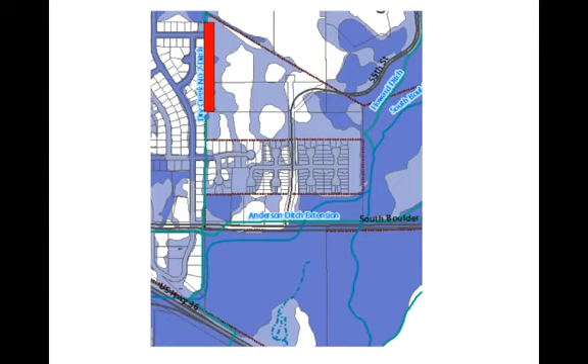Hey, this is just a quick presentation to talk about some of the issues that we've just encountered with the Hogan-Pancost flood study. So here we have, of course, the 100-year and the 500-year floodplain. The dark blue shows the 100-year, the light blue shows the 500-year. What the developer is proposing to do is develop a 1,000-foot long, 40-foot wide flood conveyance channel along the west side of this property.

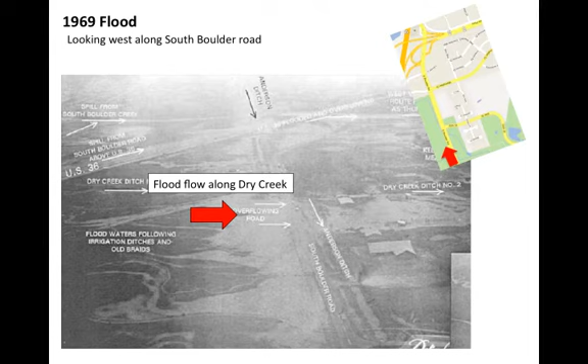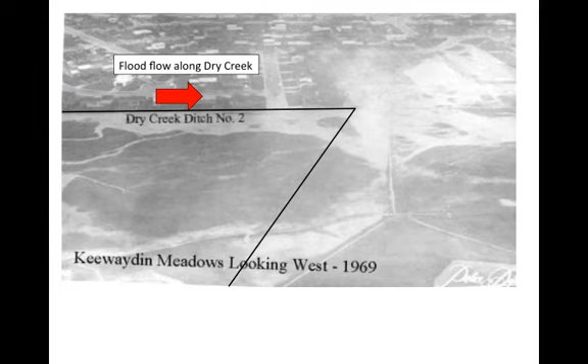So here we have a picture of the 1969 flood. As we see, we had extensive flooding along that Dry Creek Ditch corridor. Well, it turns out that that is actually an old alluvial flood channel of South Boulder Creek. We in South Boulder are basically victims of geography. Here we have that 69 flood now looking over the Hogan-Pancost property. And again, we can see those extensive flood waters flowing, even flood waters backing up into Kewanee Drive.

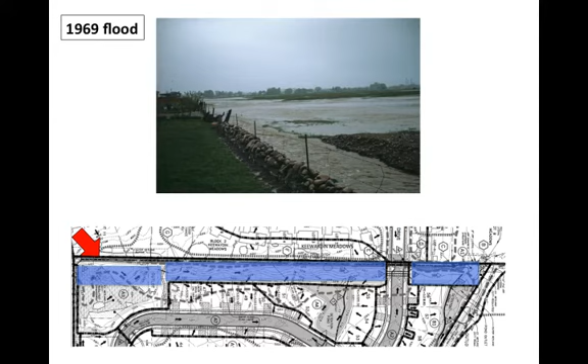Now what they're proposing to do is shown on the bottom here, and we're looking from the east to the west on that map. Here's a picture that shows the flood channel in the 69 flood from the south. And likewise, here is a photo taken from Kewanee Drive looking south. That's the Hale House in the background there.

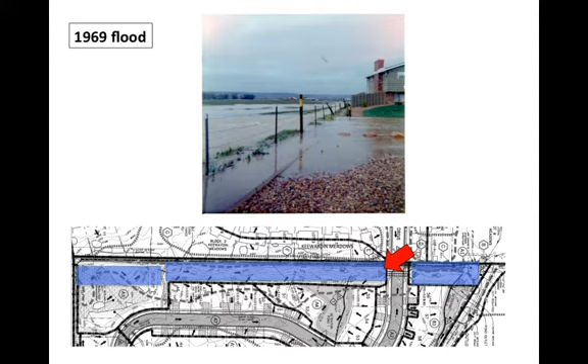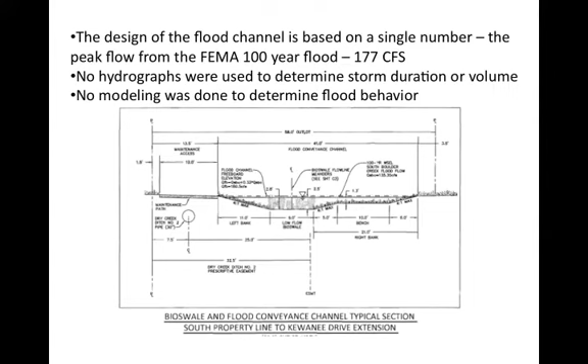Okay. So, the design of the flood channel is based on a single number, 177 cubic feet per second, the peak flow from the FEMA 100-year flood. They do no further analysis. No modeling was done to determine flood behavior. No hydrographs were used to determine how fast the floods come in, the overall storm duration, and the overall volume of it. We feel that this is a real problem. The city has the data, the city has the hydrographs, but they weren't used here.

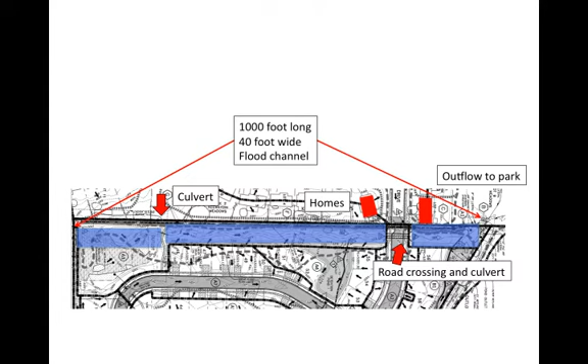Okay, well let's take a little closer look at this flood channel. Again, it's a 1,000-foot long, 40-foot wide, constructed flood channel in an active floodplain. We have a path and a culvert on the left, that's on the south side. We also have the Kewanee Road crossing and a culvert on the right. We also have a couple of homes that are very close to that flood channel. So let's take a closer look there. So as we see, now we're looking where the flood channel is flowing up to the north.

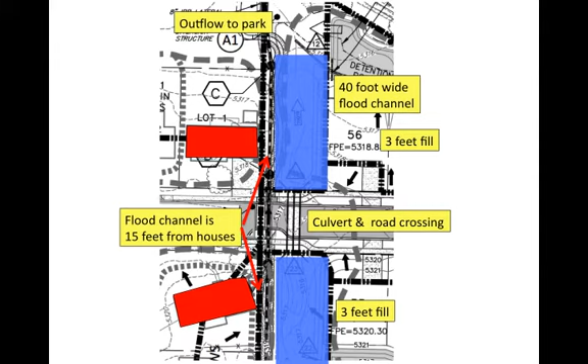Turns out that those two homes, the Carpenter home on the north and the Hale home on the south, have only a few foot setback from their property line. They're only about 15 feet from the actual edge of the house. Not their property line, but their actual houses are that close to the flood channel. Furthermore, on the east side of the flood channel, the developer is proposing to bring in 3 feet of fill to build homes there. So what we have is a very narrow channel, 40-foot wide, that's sized to hold a single 100-year flood, where all that whole drainage area, the old alluvial flood channel of South Boulder Creek, all of that water and all the local drainage is going to flow through this narrow little spot.

Well, let's take even a closer look here. Again, we have the Hale home shown on the left, outlined in red. On the right, we can see that they're going to be bringing in 3 feet of fill. It's at least, if not higher, in elevation than the Hale house. The question we have then is yes, in a perfect world, when you have exactly that amount of flooding flowing through there, that channel can hold it. But what happens in a not so perfect world?

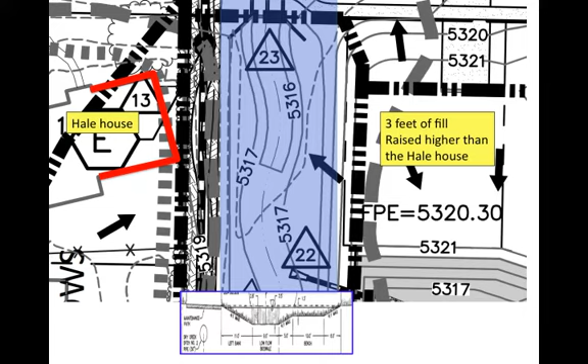What happens when that culvert under Kewanee blocks? What happens when there's turbulence in the flow? What happens when there's the storm water runoff from the actual development flowing into this? None of that is addressed in the report. And we feel that it's going to bring a huge amount of risk and potentially a huge increase in flooding to those homes in the area, as we see here.

Okay, so we have asked the city a number of times, dating back even more than a year ago, where are the hydrographs? Where's the detailed flood data that shows how the flood behaves over time of South Boulder Creek? Mind you, they have this data. The answer is that stormwater conveyance systems are just designed around peak flows, and they do not evaluate hydrographs for conveyance systems. Furthermore, they go on to state that the city did not and is not going to provide hydrographs from the MIKE Flood data, as this requires post-processing of the results that the city does not need for its studies.

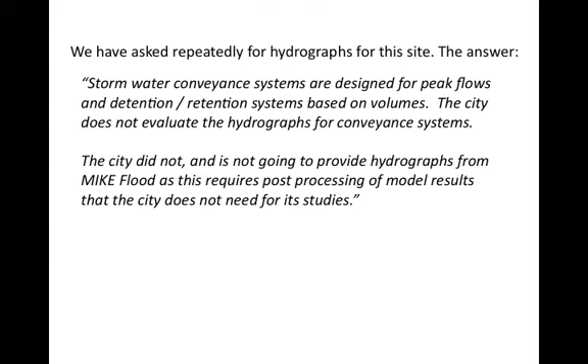So the bottom line here is that the city has detailed data that shows how fast the floods can come in, how long they last, and how much overall flood volume there will be. None of that data has been produced. As a matter of fact, they refuse to produce that data. We feel that this is wrong and egregious and needs to be addressed.